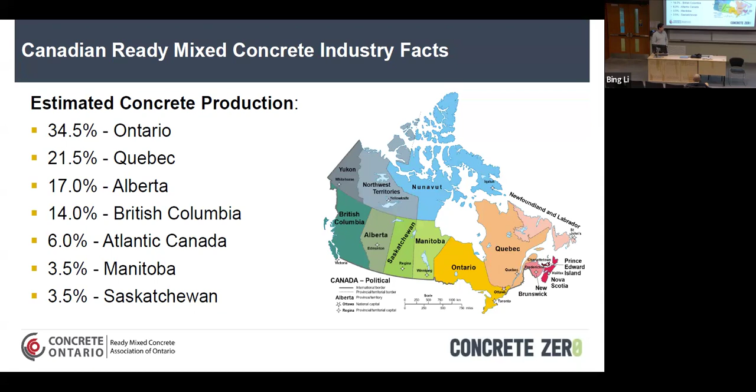In fact, if you were to look at Toronto about 5 years ago, maybe 5 or 10, we had one of the world's most amount of cranes in that city at that time. So we're doing a lot of work in and around Ontario.

So what is concrete? You guys all well know what it is, but we'll go into that a little bit. It is a man-made rock that can be shaped infinitely into any shape that you want to create out of it. It's flowable, so you can create any type of shape that you want. It has structural elements and it has aesthetic elements to it. So it's actually one of the most versatile construction materials you can use today.

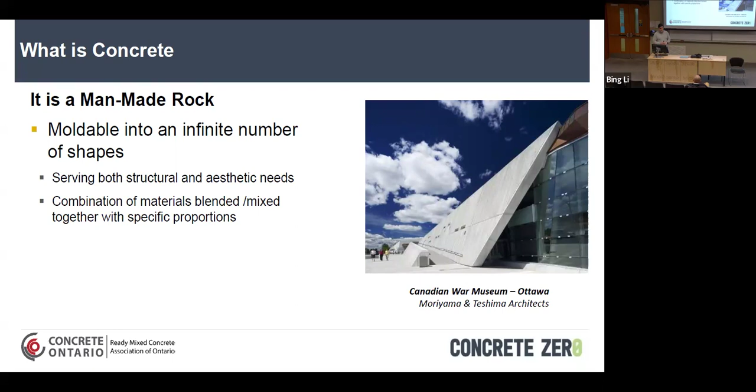So what exactly are we looking for when it comes to concrete for construction? Well, it has great compressive strength, but it's weak in tension. So you usually see concrete combined with reinforcement in order to compensate for the fact that it's weak in tension.

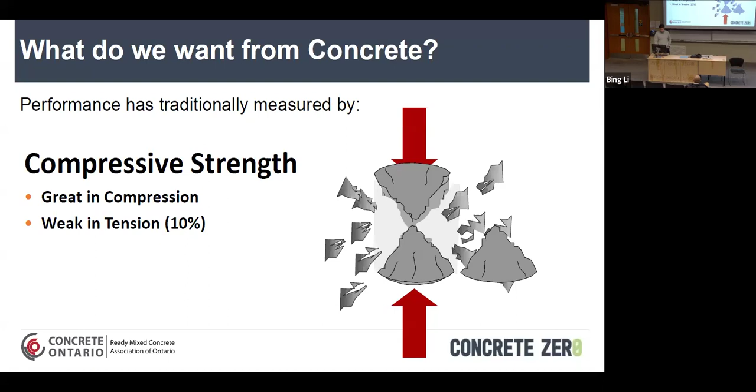The raw materials in concrete are Portland cement, aggregates, water, and admixtures. These are changing slowly because of new requirements on CO2 and new innovation that's coming out, which I'm sure some of you guys are even studying today or working on in your theses, that can be used to almost add another category or at least add to whatever's going on here. For example, I know cement is a hot topic right now for CO2, so that might change in the future, and it may not be Portland cement, it might be some other type of cement that will be available.

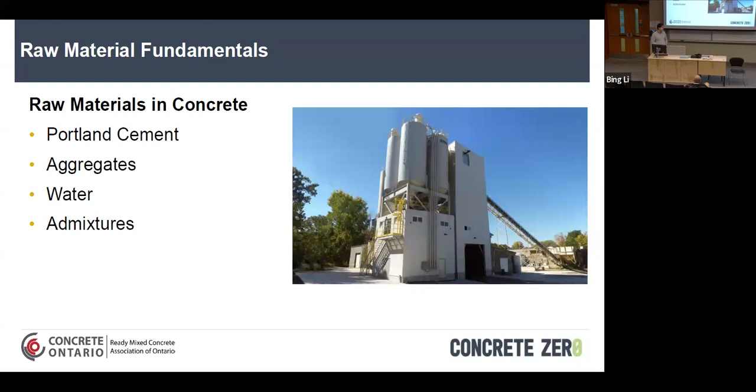How does that break down?

Yes, concrete has air in it. Regardless if you try to entrain it or not, it's going to have either 2%, 6%, or 9%, usually nothing higher than that, unless you have a flowable fill, which could have even more. Then you have 11% Portland cement. Keep that in mind for later, because Portland cement is the biggest contributor to CO2, so the fact that it's only 11% but the biggest contributor to CO2 is pretty pronounced. Then you have the aggregates, the stone and sand, and the water at 16%.

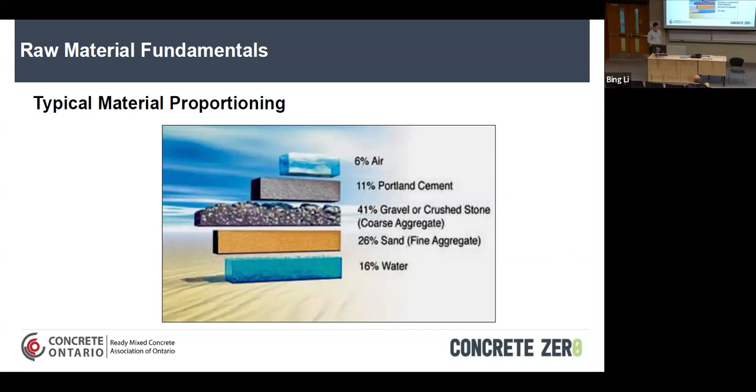The types of stones typically used in ready mix production are crushed limestone and siliceous gravel. You don't typically see other types. You might see something different in a heavyweight concrete that doesn't follow these two main ones, but these are the main ones used in ready mix concrete in Ontario.

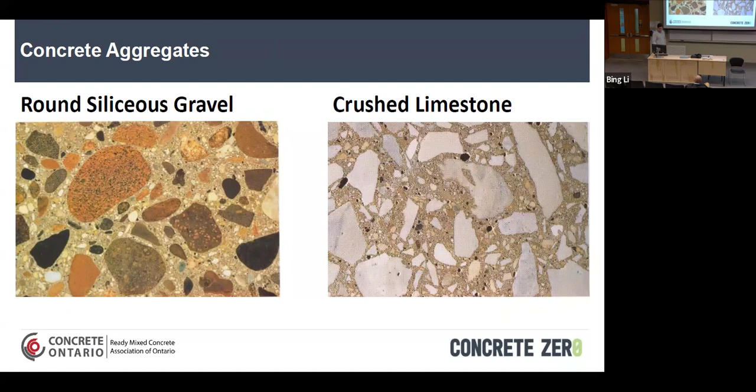Cement basics. One of the contributing factors to the high CO2 content of cement is the fact that you've got to heat it around 1100 to 1700, I think around 1450 is the target for most cements. That heating is what causes a lot of the CO2. Then you grind it all up and create a clinker, and that clinker is ground up and you add gypsum to it to make your cement.

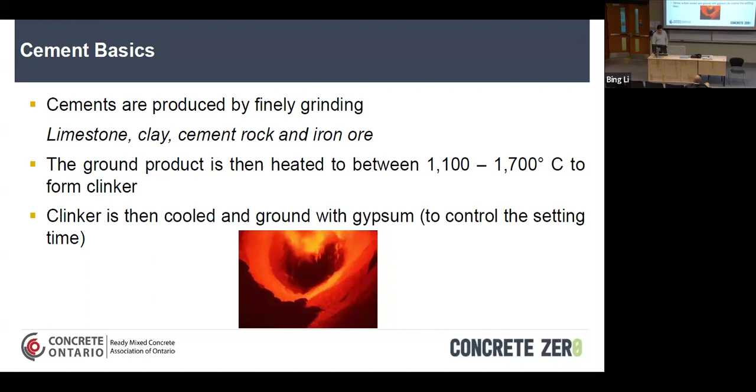These are the different types of cements that exist. The bottom four are very rarely seen - oh no, sorry, HE is seen. Moderate sulfate resistant, low heat hydration, and high sulfate resistant cements are rarely seen. GU is disappearing slowly in the industry, becoming GUL, which just means more limestone in the percentage of cement. Where they used to be below 5%, typically 3 to 4% limestone filler mixed in with the Portland cement to give you a GU or type 10 or type 1, depending on how you call it where you are, now you see below 15% limestone mixed in with the cement.

The reason they do that is to reduce CO2. By doing that - the math is pretty simple, considering this is about 5 and this is about 15 - you're reducing the CO2 by 10%. So that kind of all makes sense why we're going in that direction.

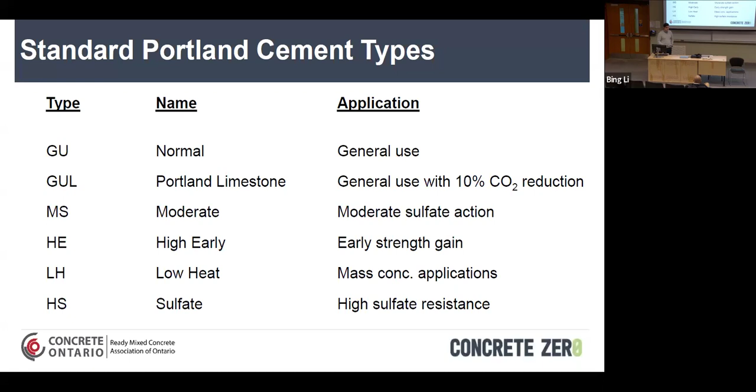Moderate sulfate resistant, type 2 or type 20, you don't typically see - I've actually never physically seen this in the industry. They usually achieve this by adding slag or fly ash or something else. You don't need type 20. High early still exists, a lot of precasters will use high early, and it's one of those you'll see. It's going to slowly start disappearing and becoming HEL, which again, just like GUL, will contain a certain amount of limestone filler. Then you have low heat hydration and high sulfate resistance, and again these are typically replaced by supplementary cementing materials, which we'll go into later.

So these are the supplementaries. You've got slag, which is a byproduct of iron blast furnaces - this is the one we use the most in Ontario. Fly ash is slowly disappearing just because we don't really produce coal burning plants anymore, those are slowly disappearing. And silica fume, you still see this, but it's a little hard to work with, so you don't see it as much as a supplementary as you would slag. Even slag itself, within the next couple of years - I think they're predicting 10 to 15 years - we're slowly going to be depleting that as well, so that's going to start to disappear. Fly ash is probably heavier out west in Canada than it is in Ontario.

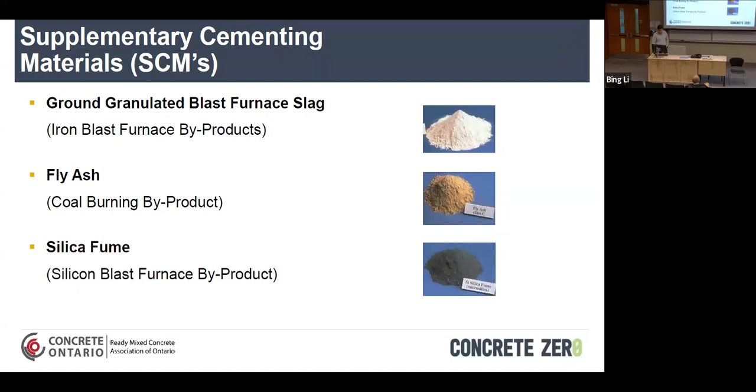How many of you have already seen this kind of stuff before? Okay, okay, so we're on pace, we're good. I'm not boring too many of you, right? Okay, good.

So supplementary cementing materials is exactly as the word calls it. You're basically taking a portion of cement out of your mix design, out of concrete, to replace it with something that can replace the cement and still give you some benefits.

Those are the supplementaries we're talking about over there. We have typical replacement rates, depending, this is typically fly ash and slag. Silica fume could be 5%, 4%, I've seen 7%. It doesn't typically get up to 10% simply because the mix becomes very sticky and difficult to work with, and most people don't want to work with that type of material.

So these are numbers really for fly ash and slag. And even fly ash doesn't go up to 50 usually, it goes below 30% if you were to see it out there. Slag can go up to 50, I've seen slag up to 75. It depends on what your application is.

Why do we use supplementaries? Well, they improve workability, they reduce the heat of hydration, they improve durability, they increase strength long term, they prevent or reduce alkali silica reaction. And unfortunately, you need to increase the curing time when you use a supplementary, just because of its strength development and how long it takes for it to actually react.

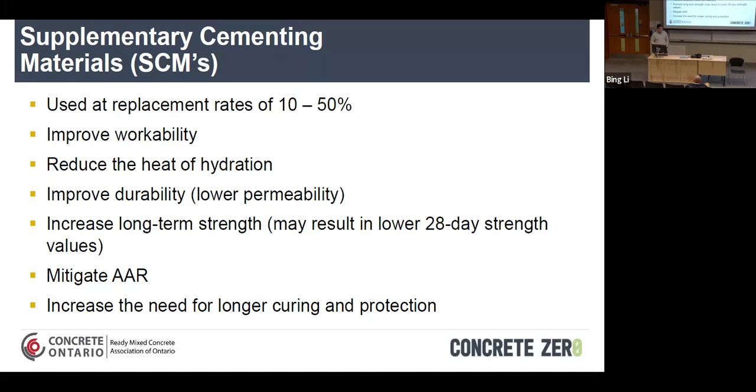A little bit of cement knowledge here, chemistry. The hydration occurs when you mix Portland cement and water together. They get calcium silicate hydrates plus calcium hydroxide.

Supplementary cementing materials cannot produce calcium silica hydrates on their own. And that's why you can't just use that to supplement cement. They need the calcium hydroxide here in order to, well, guess what they're providing out of this whole equation here. So the calcium hydroxide, the supplementary cementing material and water, you're missing one component to give the calcium silica hydrates. That's what the supplementary provides. And you get calcium silica hydrates, and that's how they function in the cement side of things.

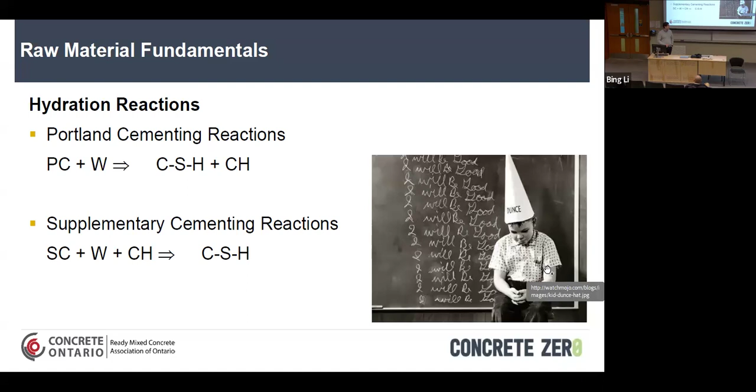I'm going to skip that one. So the effects of supplementaries in plastic concrete: you will have longer curing times, which is something you have to deal with in the field. So when they're building buildings, you have to take that into consideration.

Your heat of hydration is reduced typically with fly ash and slag. With silica fume, it can often stay the same or increase the heat of hydration. The heat of hydration is how much heat is being produced when that chemical reaction of cement is occurring, and you get a certain amount of heat that gets produced by that chemical reaction.

Then the setting time, usually slag and fly ash will retard the setting time and the final set. Silica fume may have no impact on setting time, or it can increase, or it can decrease setting time. It's kind of in between. It depends on how much you have in there and how fine it is and a whole bunch of other things.

SCMs typically help with pumping. And this is like a really key one right now, it's what the industry is really talking about: greenhouse gases. The government of Canada has mandated that by 2030 we're going to reduce the amount of CO2, specifically in concrete or in the industry in general, by 50%. And by 2050, they're expecting a net zero CO2 content. So that's a very big topic right now in the industry, and they are already trying to develop ways of getting concrete down to net zero.

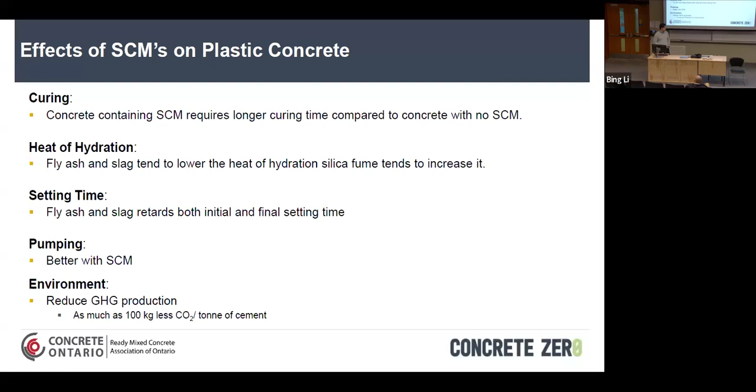Admixtures. So what you're seeing in pictures here are just different colors of admixtures. Anyone know why they changed the color of the admixture? Not the original color for all these things, these are mostly clear.

Go ahead. Just distinguish them, basically. Yeah, so when the driver comes and delivers, he knows I've got blue, that's purple or pink. But that's really the only reason why they do it. And also it looks cool. That's exactly why they do it.

This is a typical system you'd see for actually pumping admixtures into the plant. So it's all liquid based and it goes through hoses and meters and such to get up in there.

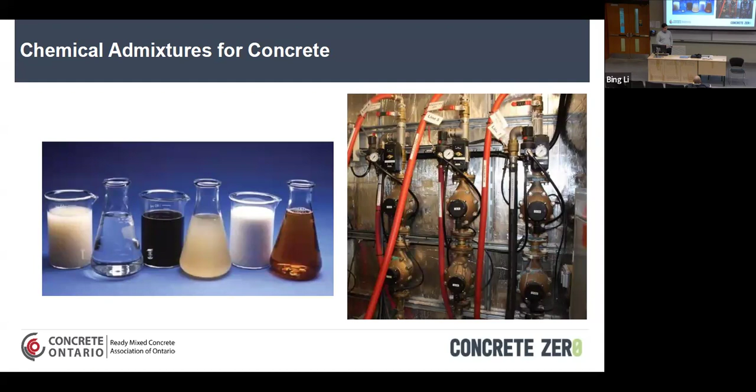If you were to go to ASTM C494, you'd see a definition of different types of admixtures that exist in the industry. Water reducers basically do as the naming says, reducing the amount of water you need to get the same slump. Retarders, we'll go into a little bit of retarders and accelerators in the next slides, but you'll understand that shortly. And then you've got a combination of different types: water reducing, retarding, water reducing accelerating, high range, and so forth and so on.

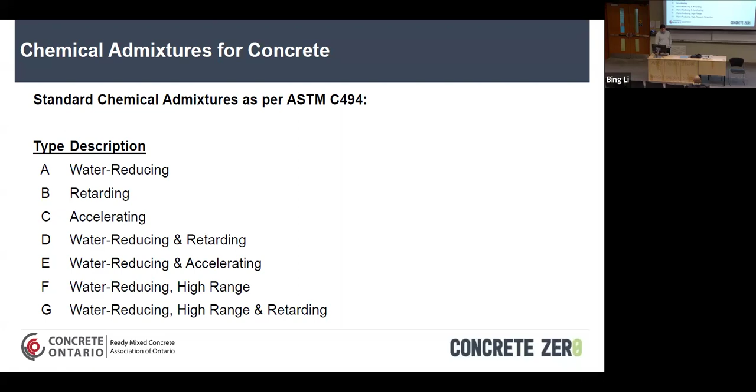We do add air into concrete. We add air - we'll go into that a little bit later too - to help with its durability and its survival in our winters.

If you want to increase the workability of the concrete, we add superplasticizers. There's also a whole slew of different admixtures. For every problem concrete has created, there are admixture solutions to those. Why am I saying that? Because we need to add steel into the concrete in order for it to be viable, because of its tensile strength. Well, there's an admix that helps avoid the corrosion of steel in the concrete.

Hydration stabilizer. Let's say you need to deliver the concrete 3 hours away from the location where it's made or mixed. You add a hydration stabilizer to give you that distance so it doesn't harden in your truck.

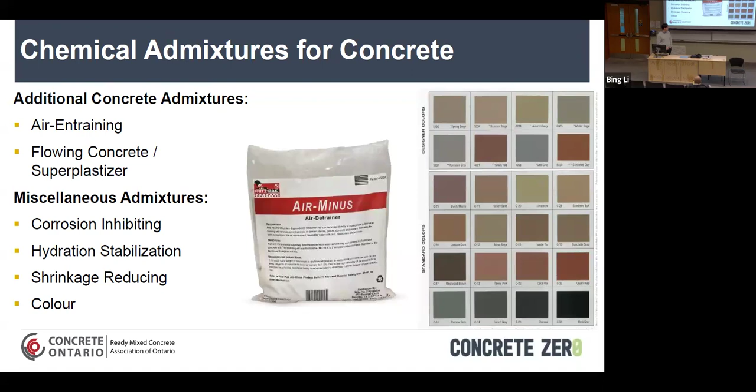Shrinkage reducing. Concrete tends to shrink - you're going to get a considerable amount of shrinkage. You can add a product that helps reduce the shrinkage that goes in the concrete. And because it's an architectural product, you can also change the color of it. Not everybody loves gray - some people want pink. Whatever floats their boat.

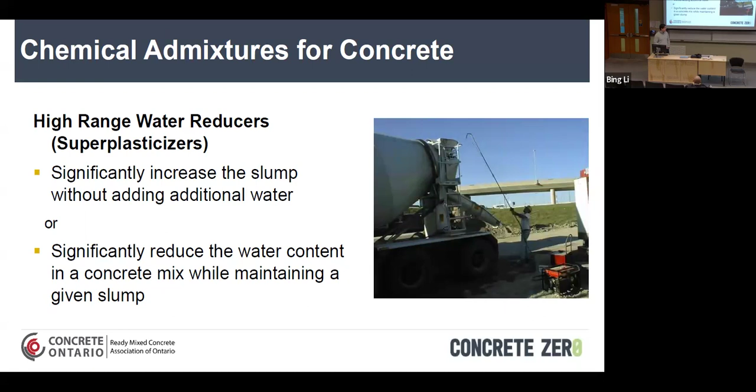High range water reducers. The idea of a high range water reducer or superplasticizer is to help reduce the amount of water that you need in the mix, but maintain your slump. Or it helps you increase your slump in a mix that already has a specific amount of water in it. That's the purpose of those products. Now, why do we care about the amount of water that goes into the mix? I'll tell you in the next slides because it's not where I thought it would be.

We have accelerating admixtures. Accelerating admixtures are exactly as they say they are - they help accelerate when the set time of the concrete occurs. So, like I said, when you add Portland cement to water, you get a chemical reaction. That chemical reaction can be impacted by temperature. If you end up putting concrete in a colder climate, you're going to increase the time it takes for that reaction to occur. You're going to increase setting time, initial set, and final set.

Those are important parameters because initial set is usually when a floor finisher will get on top of your concrete and finish the floor. Final set, they're already too late - most times they're not really doing much after that. So they have a specific window that they can go on top of the concrete and finish it to make it nice, smooth, and finished.

So that's why we play around with these parameters so that the floor finishers - if you guys have ever been on site, they like to complain a lot - so we don't want them complaining. That's why we added an accelerator. It helps in two ways: one, it will speed up when that set time occurs.

Let's say that they're trying to get traffic on the 401 - I've actually done a job like this. We're trying to get traffic on the 401, and that concrete has to set within an hour or two before traffic goes on top. So you need to set it up in an hour or two, you'll add an accelerator - concrete doesn't naturally set up in an hour or two. If you're doing it in cold weather, again, the same thing - it will help you adjust that set time so that it sets at a normal time rather than delayed or accelerated. There are two types of accelerators: non-chloride and chloride accelerators.

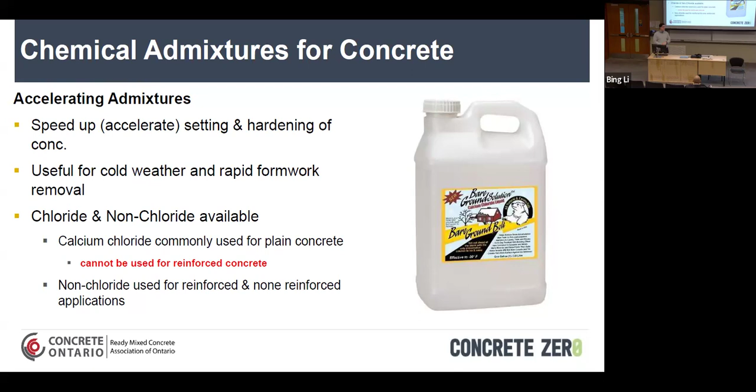Retarders do the opposite of an accelerator. If you are in a hot weather condition and you're trying to make sure that the concrete doesn't take off too quickly so that the floor finisher can get on top of it, you need to add a retarder. It slows down the reaction so that the finisher can get on top of it.

The other use is maybe you want to retard the concrete for a certain amount of time because you have a large pour, like a bridge deck, and you don't want pour lines or cold joints from two concretes combining. You can retard the concrete. I've seen projects start with concrete expected to retard for 15 hours, then keep reducing the retarder so it all tries to set at the same time. Since we can only deliver concrete at 8-9 meter loads, and a big project might require 50 meters, you want it all to set at the same time for whatever reason the project requires.

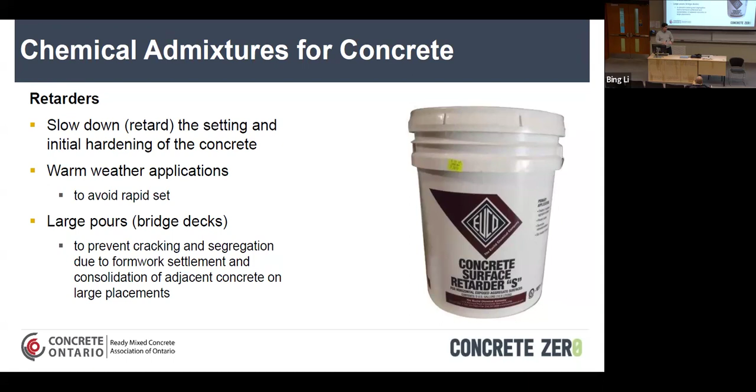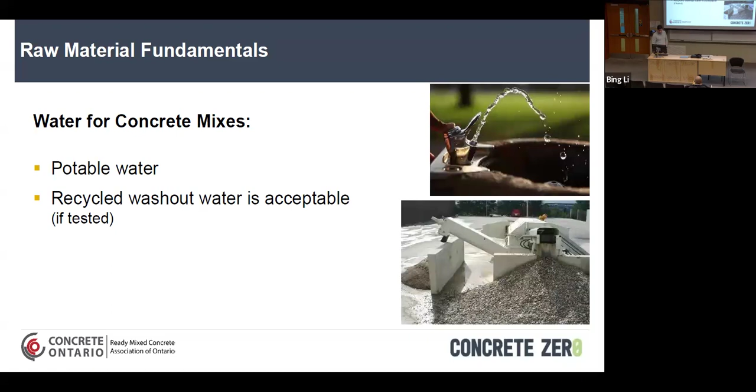Water needs to be potable, and you can use recycled water as long as it's been tested. I've seen precast plants use well water that smells like sulfur - you'd think it's not good, but they've tested it, it's fine, it passes, and they use it. I wouldn't drink it though.

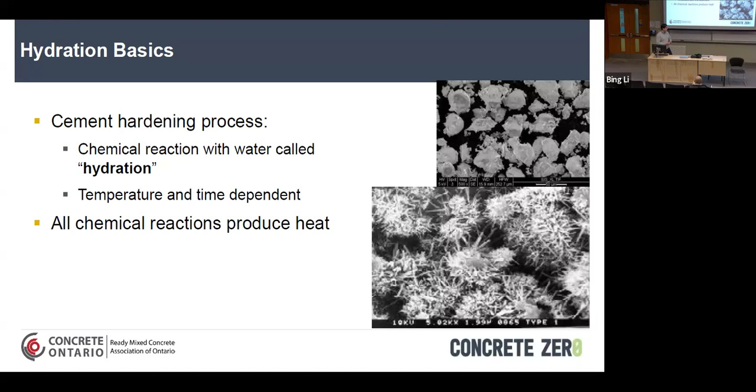We hit on this a little bit earlier - hydration. Hydration is when the water and the cement start to react, and it requires a certain amount of water to hydrate. That whole process is called the hydration process. It is temperature and time dependent, and it's a chemical reaction, so it produces a certain amount of heat. High cement contents will increase this.

So why would we want to worry about hydration, heat, for example? The next slide is going to talk about heat and hydration - why do we worry about that? Anyone know? It can raise the water temperature - yeah, it can do that. Any other reason?

Because there's a thing called thermal cracking. You can have the concrete in the center heat up too fast while the outsides are cool, and it will crack the concrete - it's a differential in temperature that cracks it. That's why we want to control heat of hydration. Too much cement can cause a greater amount of heat of hydration - makes sense because that's the thing reacting, creating heat.

If the concrete's too thick, it can have a greater heat of hydration. Why is that? If the concrete's too thick, it doesn't dissipate fast enough - it takes time for the heat from the center core of a 1 meter pour to dissipate and reduce the heat of hydration. That's why thick concretes have higher heats of hydration.

SCMs reduce the peak temperatures in the way they react with the cement to create calcium silicate hydrates - it's a slower process, and it ends up reducing the temperature that gets created.

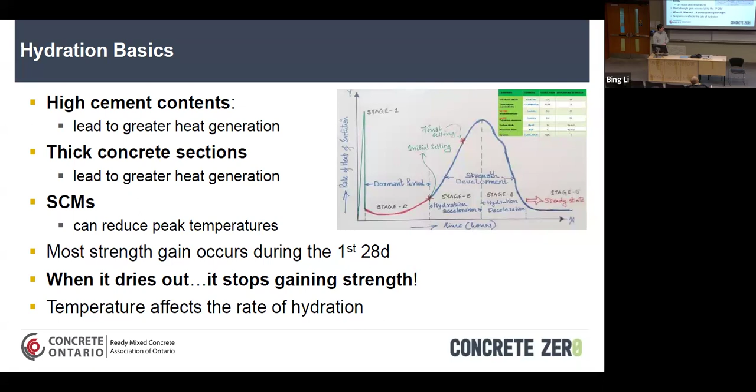So under higher temperature effects, what happens? Concrete will start to gain strength considerably. You'll start to lose your slump considerably. And your set time will decrease. Make sense so far? What you might not know is that you'll get a higher initial strength when you heat your concrete.

You get a higher initial strength when you heat your concrete, but you'll get a lower ultimate 28-day strength. And that has to do with the chemical process. It has to do with you gaining more tricalcium silicates in your first 7 days with the higher temperatures than the dicalcium silicates. And that is what gives you your initial high strength. But the dicalcium silicate is what gives you your ultimate higher strength down the road.

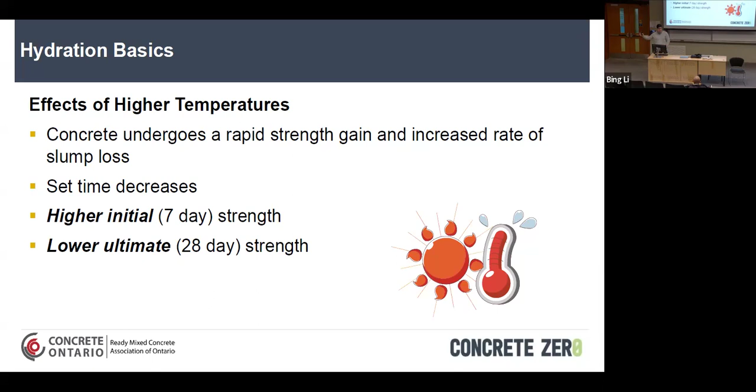So they don't want that either. So you kind of want, it's kind of like the story of the three bears. One is too soft, one's too hard, and this one is just right. That's kind of the setting time they expect, and that's what they want you to give them.

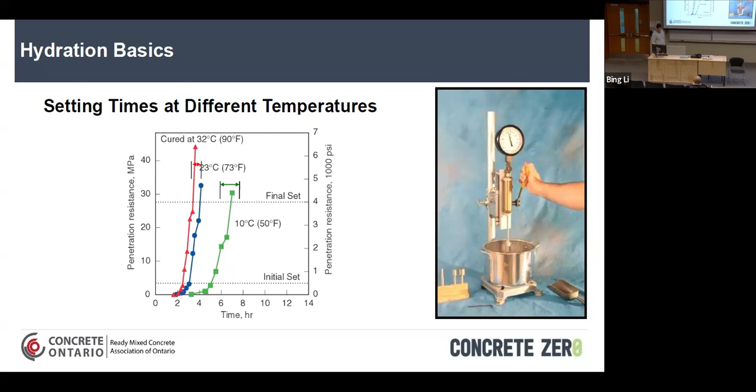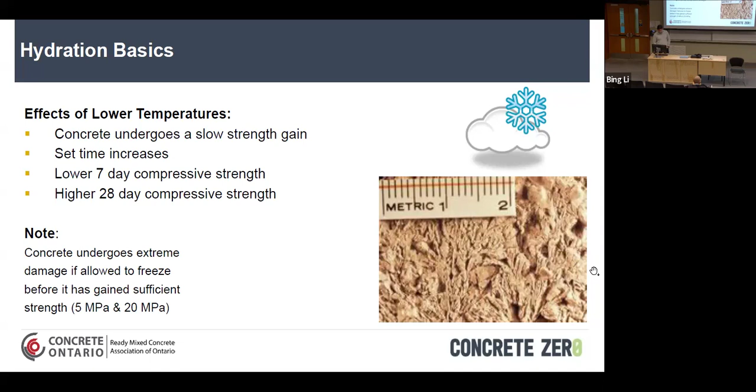It could be whatever fantastic theses you guys are working on that you're trying to incorporate into concrete. They're looking at things now in the industry like graphene is starting to become a little popular. There's different materials they're looking at to try to add to concrete to make it either lower CO2 or cheaper or better in performance.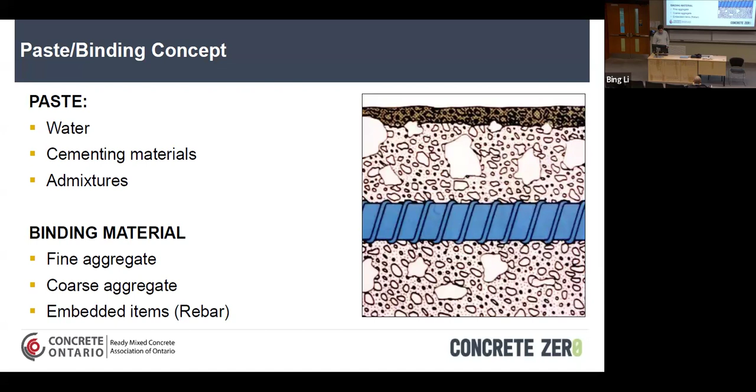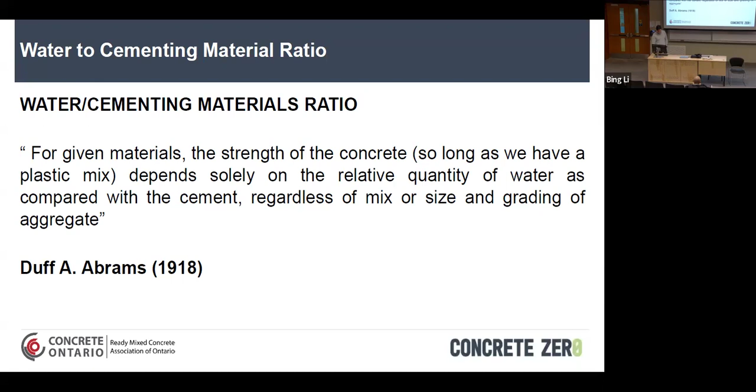Water cement ratio is what impacts your concrete strength. As long as you have good aggregates, it's pretty much the key function for a lot of things in concrete. For example, it impacts your compressive strength, it impacts your permeability, your shrinkage and cracking, it can impact that.

And again, this one's like the three bears. If you have low water cement ratio at around 0.32, then you're gonna get something called autogenous shrinkage. If you get something like 0.8 water cement ratio, you're gonna get drying shrinkage in your concrete. Those are gonna be the major shrinkage factors.

Abrasion resistance, the lower the water cement ratio, the more abrasion resistant the concrete is. Permeability has to do with the fact that if you have a high water cement ratio, basically you have these crystals that are forming. The lower the water cement ratio, the crystals start to really bind together and you don't have a lot of space for the water to travel. Plus that water that's in there goes somewhere when it dries and it creates channels. So that's why the permeability changes.

Go ahead. Sorry, you asking a question? Oh, okay.

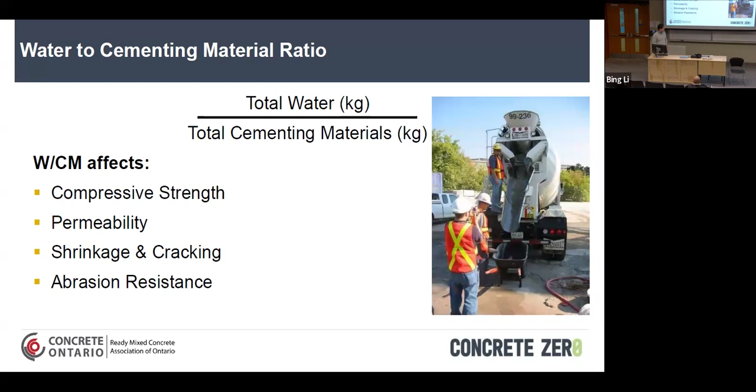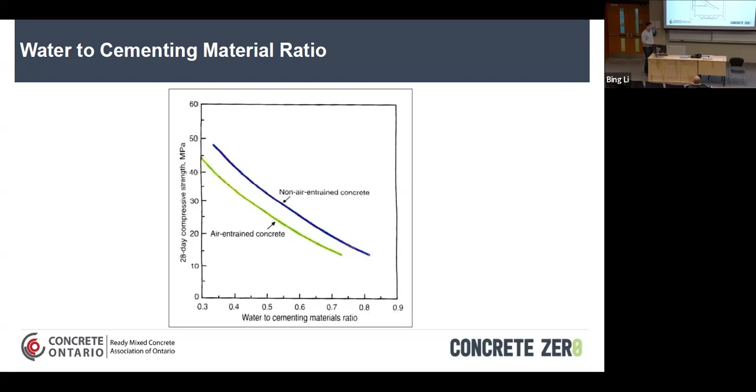Air entrained concrete versus non-air entrained concrete behave the exact same way. Non-air entrained just means it has the standard 2-3% of air that's already entrapped in concrete. Air entrained usually means somewhere between 4 and 9%, depending on the spec. Of course, you're going to get a little bit of a strength decrease with air entrained, simply because it is air, you're adding air to the concrete, and it's got no strength to it. So that's why you'll see a bit of a strength loss.

So the advantage of using lower water cement ratios in concrete: you get increased strength, lower permeability, as we just talked about, and resistance to weathering and freeze-thaw, because of the low permeability and increased strength. You also get a better bond between the concrete and the reinforcement, usually, depends. If it's too dry, that could be a problem as well. If you don't have proper consolidation, that's going to be a problem. Can you reduce drying shrinkage? Yes, but it's going to increase autogenous shrinkage. So there is a limit for drying shrinkage, around 0.4 water cement ratio, and then there's going to be less change in volume when you wet the concrete and dry the concrete.

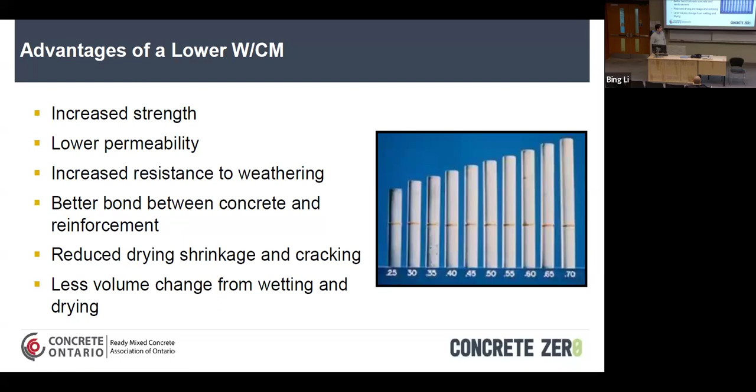Okay, so these are kind of the increases. The only difference here is that you'll have bleeding as you increase your water cement ratio.

Bleeding is the water that comes to the top that's not been bound to the cement particles. That water is going to come to the surface, and too much bleeding is never a good thing for the floor finisher. We really care about that floor finisher, because we want that person not to get too angry at us. So bleeding is important, they don't want too much bleeding.

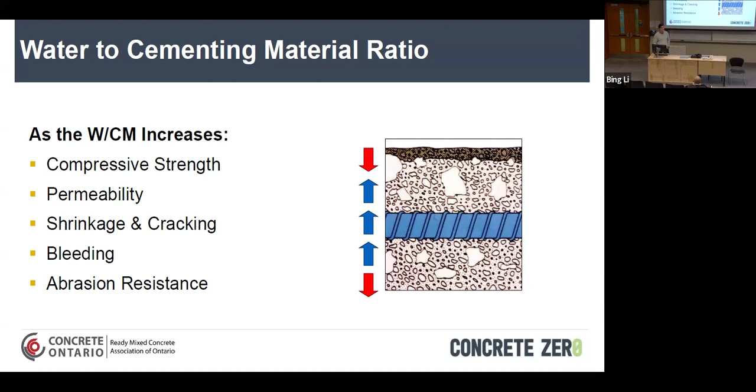They don't want to wait for the bleed water to disappear before they can finish the surface. No bleed is also a bad thing, it usually means it's a pretty sticky concrete. They want a little bit of bleed, but not too much. That's what they'll tell you. And then you ask them, what does that mean? What does a little bit of bleed mean for you? Just a little bit of bleed, not too much.

Air entrainment for exposed concrete.

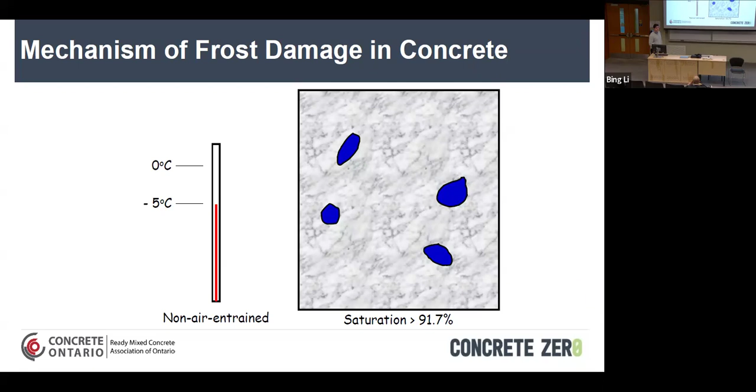So this is concrete. The reason why we have 91.7% saturation here, as you can see, is you don't have the voids fully filled. The concrete temperature, or let's call it the water temperature, is getting down to 0 degrees. What happens? Water starts to freeze. You get even colder because there's a little bit of salt in that water, so you have to go usually lower below 0 degrees. Get a little colder. How did that happen? How did it grow? Because water expands when it starts to freeze. So that void is now fully filled with water and ice, it's a combination.

Okay, uh-oh, I don't like these lines. What happened? It cracked. Why did it crack? Because that water kept filling in the void, and eventually it was too much and it created a lot of pressure within that void, and it's trying to go somewhere, but it's got nowhere to go. So it causes a lot of stress in the concrete and cracks start to form.

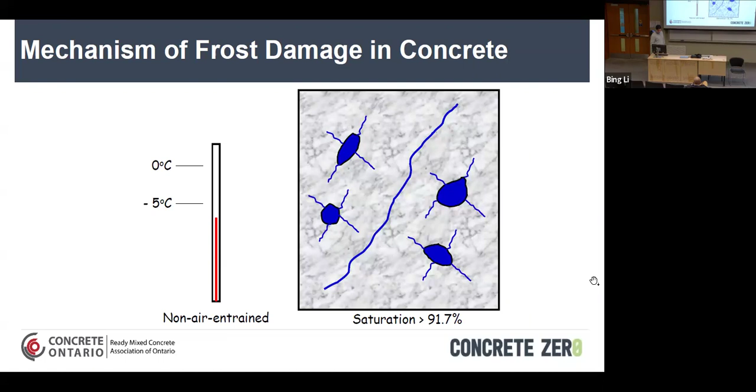I believe the reason why it's 91.7 is because water expands 9%. I thought it was 7 too. Okay, whatever, it expands, and that's supposed to be the number just above expansion.

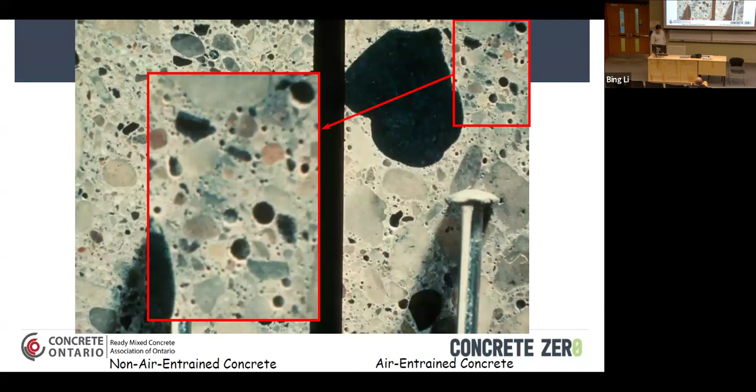So we developed a system to help prevent cracking. How did we do that? We added air entrainment into the concrete, these little bubbles that are everywhere. It's only a certain percentage, because when you get too high in that air entrainment, you start creating air that you don't want in the concrete, and I'll explain that in a second. Also, you start reducing your concrete strength. When you get too low, you don't get the amount of air that you need. When the bubbles get too big, I'll explain that in the next slides.

So what happened there? Water needed somewhere to go, but this time it met its friendly air bubble in the corner. It had a place to go and fill, to move. And because it had a place to move, it didn't cause so much stress into the concrete, and the concrete didn't crack. That's why we use air entrainment.

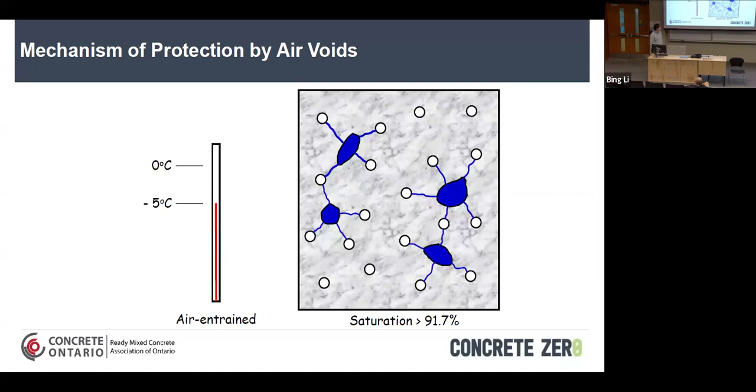And when the temperature starts going back up again, these start to empty out and go back into the bigger void, until everybody's happy and the concrete isn't cracked.

So this is an example of an air void filling up with ice, before and after. This is the before, and this is the after.

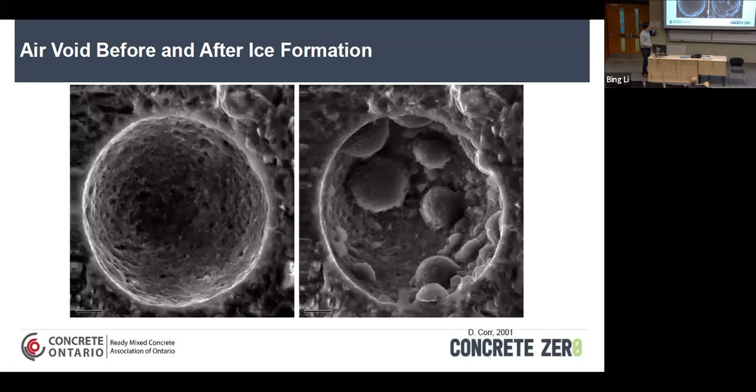So the amount of hydraulic pressure that gets formed - we don't want a lot of hydraulic pressure because that's what causes the cracking in the concrete. But how can we prevent it? How can we try to reduce the amount of hydraulic pressure that gets formed?

Well, the degree of saturation is going to help. Like we said, the 91.7 - if it was 91, it wouldn't have cracked. If we can control that somehow, then we win out. It won't crack your concrete.

The rate of freezing - if it freezes abruptly and quickly, you're going to get cracking again because it's just going to be too fast for the water to have a chance to move anywhere, and it's going to create pressure.

Permeability - if it can travel from the big bubble to the small bubble too fast or too slow, it's going to cause an issue with the amount of pressure that gets built up. And of course, the distance to the bubble: if a bubble is close by, then it has a place to go. If it's not close by, then it's useless.

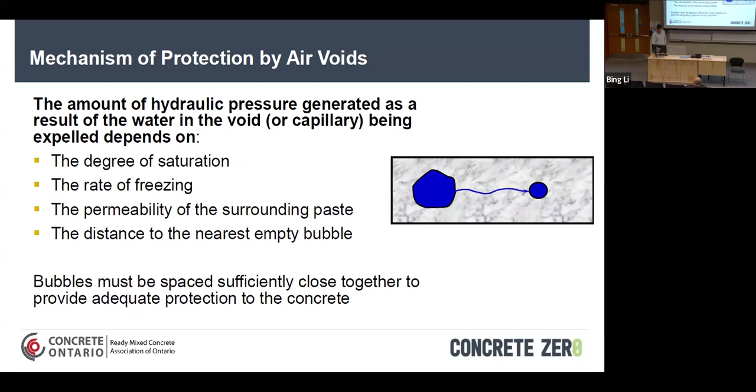And we look at this in the industry - it's called spacing factor and specific surface. Specific surface is important because we actually need a specific size of air bubbles to give us a well-distributed system of air. And the spacing factor gives us the idea of how far away every bubble is, so that the water can travel. We actually look at that in the industry, and there are specifications for that.

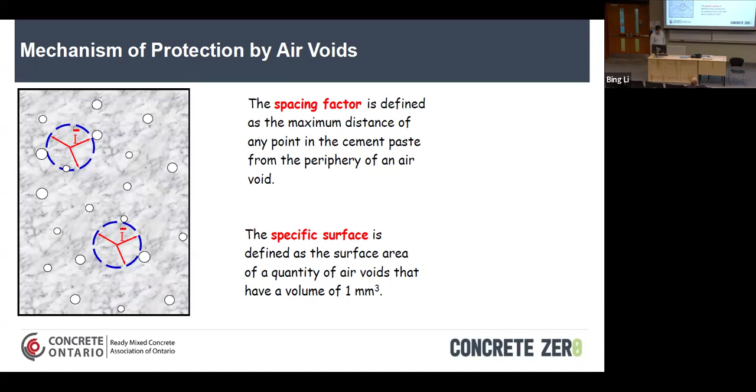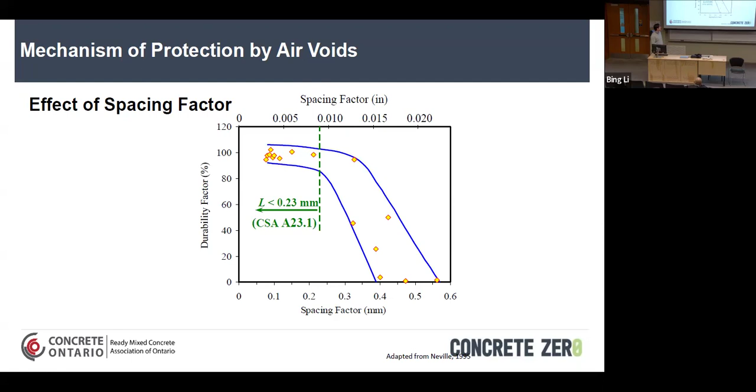Everything that is below 0.23 millimeter in diameter, those are the airs we want. When you air entrain concrete, unfortunately you get other stuff too, because it's not all perfect air - we also get bigger air bubbles, and that's okay. So when you're getting 6% air in concrete, you're going to get some big and some small. Unfortunately, that's just how the game goes, because the air that gets generated is caused by friction. You don't always get the perfect air size bubble. So that's the one we kind of target in our concrete.

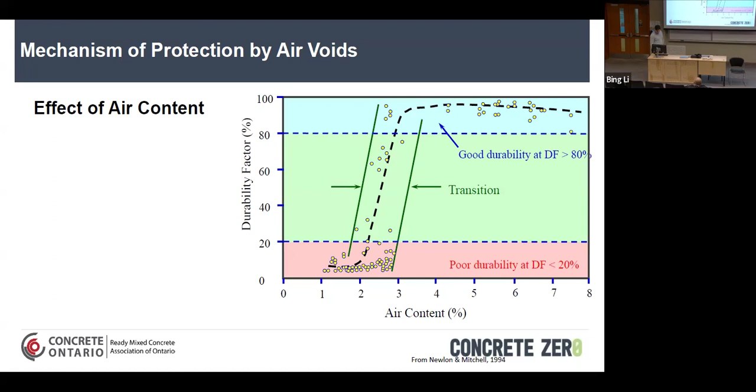If you have the right amount of air entrainment in the concrete, that helps avoid this. You also have to make sure that your aggregates are frost resistant, meaning that they don't fill up with water, burst, and then cause spalling.

And then they're going to call their construction company. Then the construction company is going to call the concrete company, and then everybody's going to have lawyers talking to each other about how they're not paying for this. And that's how it works. But a lot of it is just because they decided to take the heating off, or timing, or anything.

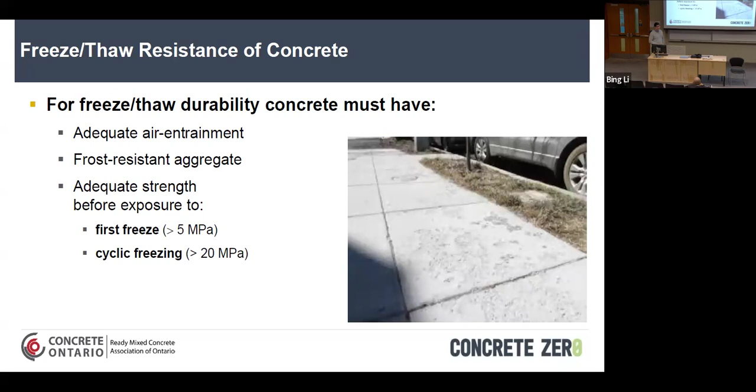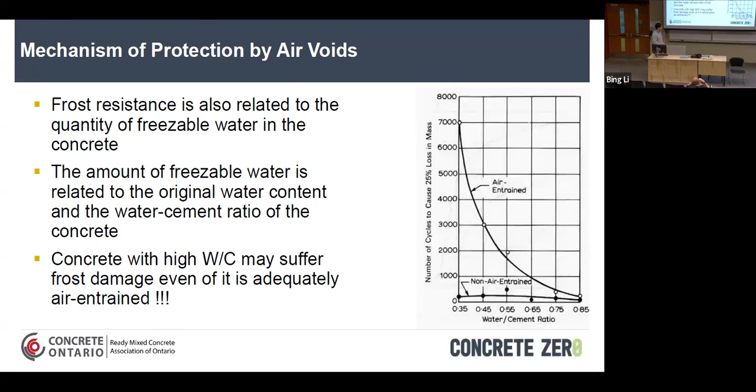Now, sometimes even if you have a perfect air system in the concrete, if your water-cement ratio is way too high, it's going to break anyway, because the freeze-thaw cycles are - again, it's about the hydraulic pressure that gets created. If that hydraulic pressure is too high, higher than the strength of the concrete, you're going to get damage anyway in your concrete.

This is another reason why, you can see it here. Forget about the sidewalks, we really don't want to see that. Whoever's standing around this thing, I'd be watching out. Look at all that concrete starting to fall apart. We don't want that.

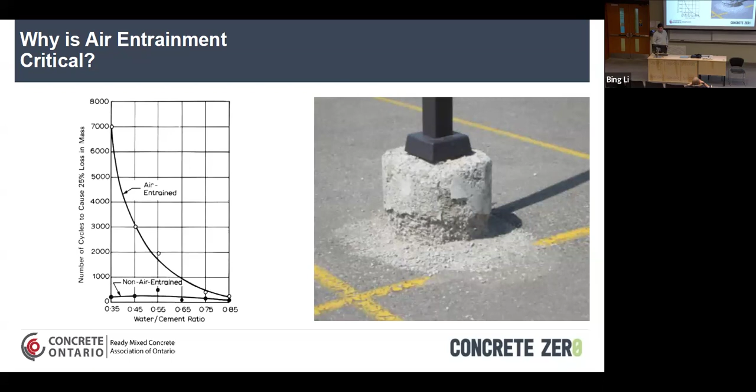So other advantages of using air entrainment: it improves workability. It can reduce segregation because the air acts as a way to prevent the water, the water has to go around the air for it to come up, so it kind of reduces segregation. It reduces bleeding for the same reason.

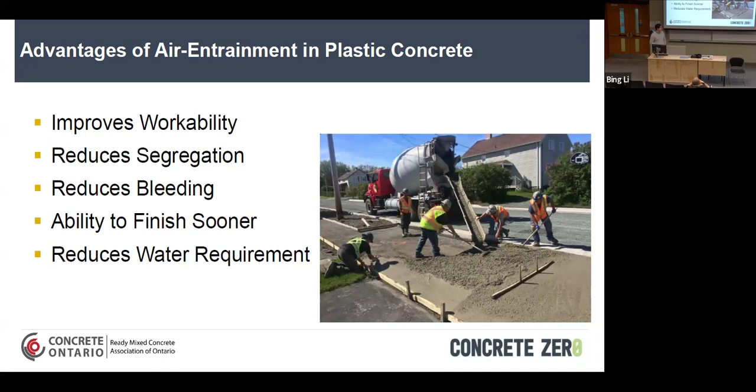Actually, I was talking about bleeding there, not segregation. Segregation is, I think, because the air helps keep up the aggregates. You could finish a little bit sooner, and it reduces the water requirements simply because it improves durability and workability. Again, salt scaling and freeze-thaw is the reason why we use air, and it can also help improve sulfate resistance.

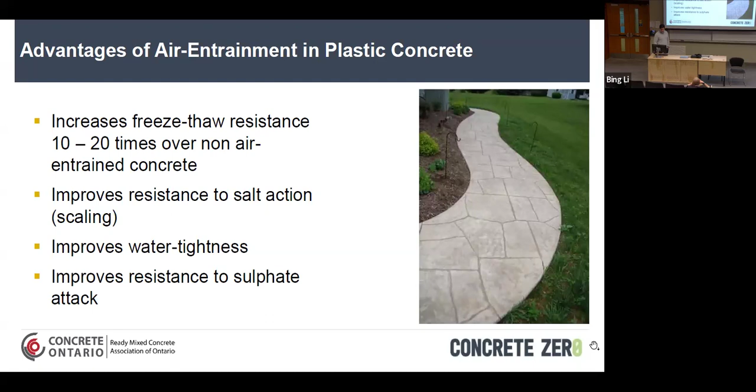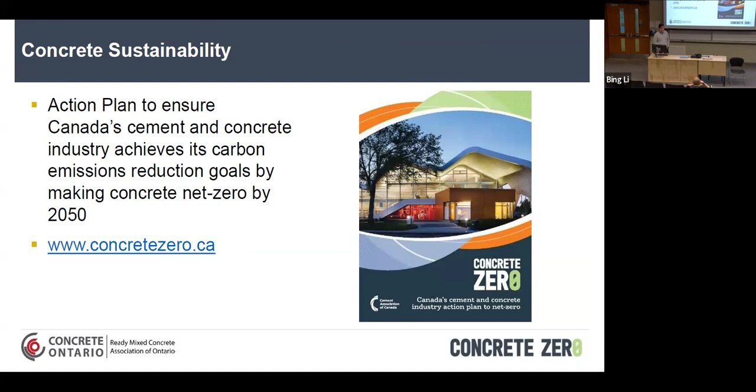This is moving on to what we were talking about earlier about net zero 2050. We're trying to get concrete at a lower CO2 content so that we can achieve the 2050 goals that the government of Canada has come out with. So there is an action plan in place. Here's kind of a breakdown of where CO2 comes from.

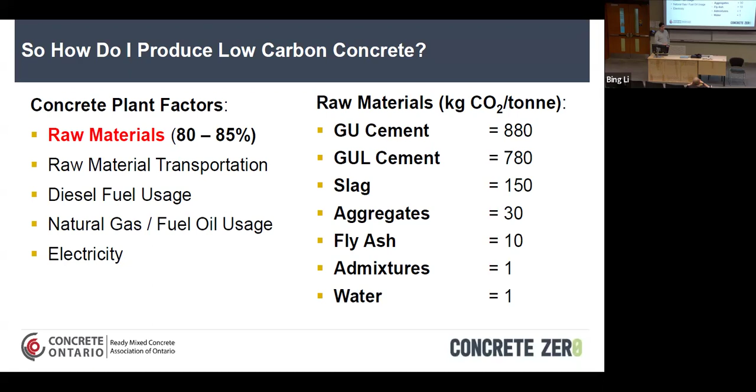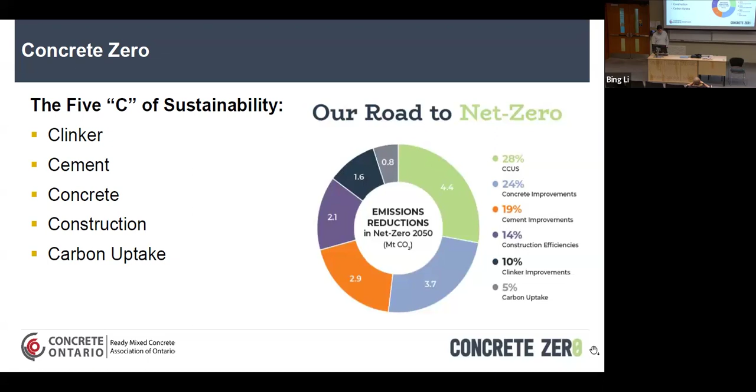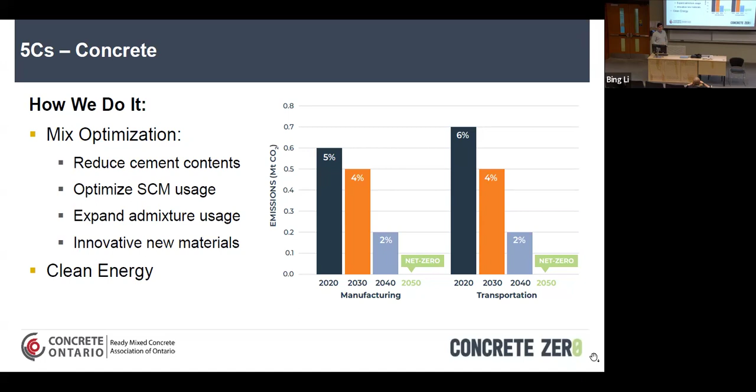And trust me, they're all thinking about it. Alright, 2 more minutes.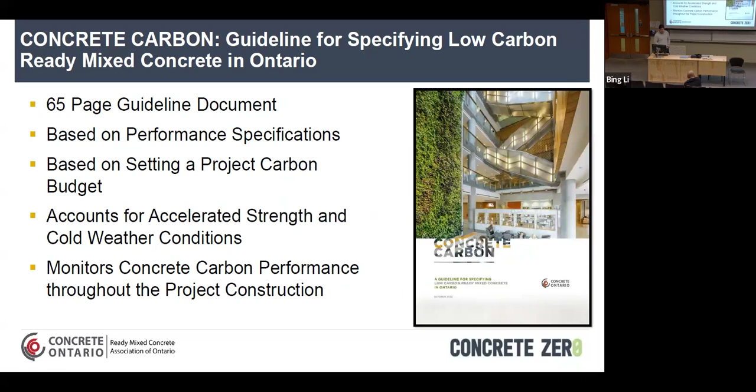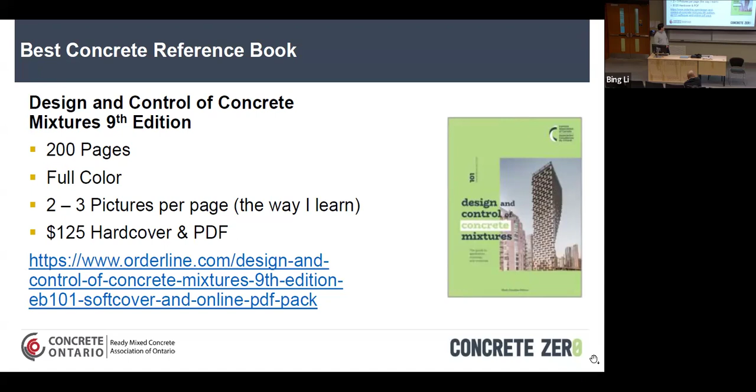Okay, I'm almost done. This is just a guide developed by Ready Mix Concrete Ontario, which highlights how to specify for low carbon concrete. It's already out there, if you guys want to look it up online. It's very interesting. This book is probably one you've seen if you're taking a concrete course. I have the 7th edition, this is the 9th. I still use it today, go back to it, reference it all the time. It's a really good book, and you can actually order it online. I don't know why I'm the one telling you to go do that, but if you want to, it's a good book. So before we move on to the next questions, I'm just going to go into the ACI stuff.

How do we do? Is it control fire? No, that wasn't it. I think I just did something. I didn't get closed. It's only 2 minutes or so. Oh, there we go.

We help with scholarships, and we do quite well with recognition in terms of awards and such. We also sponsor teams. Anyone here from concrete toboggan? Okay. You dealing with Frank at all? No? That name doesn't sound familiar? Okay, we help sponsor and contribute to a bunch of different sponsorships in the industry.

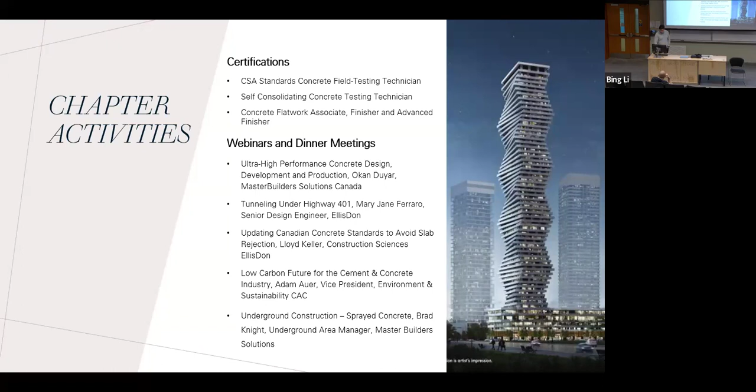Underground construction, for example. We talk about a whole bunch of things that the industry is concerned with and interested in, and we get lots of people showing up. The webinars are quite good. You can go on our website to take a look at what's coming next. We also do site tours where we'll go see a cement plant or a precast plant, and you actually see how those things function in real time.

We have a seminar coming up. It's a full day seminar, Lobster Fest, where we go through state of the art topics, for example concrete durability design. We really talk about topics that the industry is interested in. If you're in the industry and dealing with concrete, I'd advise you come to these things, because first of all you get to know people in the industry and find out what people care about. And then at the end of it, we have a lobster fest and pig roast, so you can stick around for that too if you want.

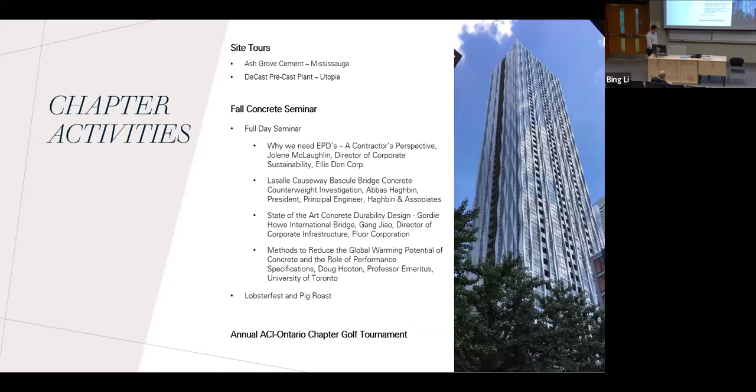In 2025, Toronto is hosting the International ACI Convention. It's a big deal, lots of people come to it from all over the world. ACI isn't just in America, it's in Canada, Australia, anywhere that uses the American standard. I think the Philippines too, there's a whole bunch of different countries that use ACI, and they'll end up showing up to this conference themselves. It's a pretty big one that's coming up.

Lots of topics are going to be discussed. There's networking for students, and a student competition, for example you'll have to design a bowling ball that's fiber reinforced. Things like that are coming up, and I'd advise you look into it. It's on our website, coming up March 30th to April 3rd, 2025, and we're hosting it. It hasn't been hosted here in a long time, so we're hosting it here in 2025, and that's it.